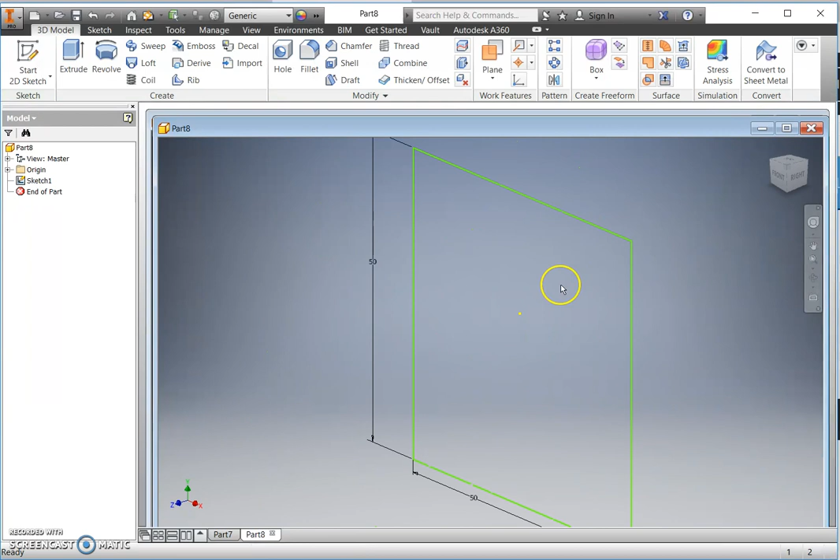I'm now ready to extrude this shape, and to create our cuboid we were extruding this through a distance of 100 millimeters. You will see that size detailed on your plan view. So that's the basic shape to begin with. I'm now going to remove a section at this end and then I'll add in a section at the other.

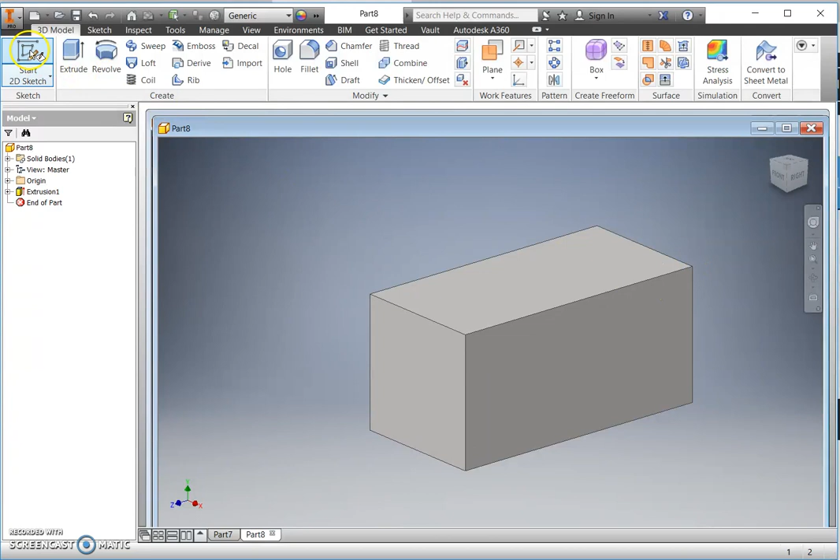So starting a sketch, selecting the surface, and I'm going to add in a circle. Again, not worrying about the size at this stage. This circle has to be in the centre, so when I dimension it, if I know the size between the edges is 50, and is the same from bottom to top, I know the distance between the centre and this outside edge here must be 25.

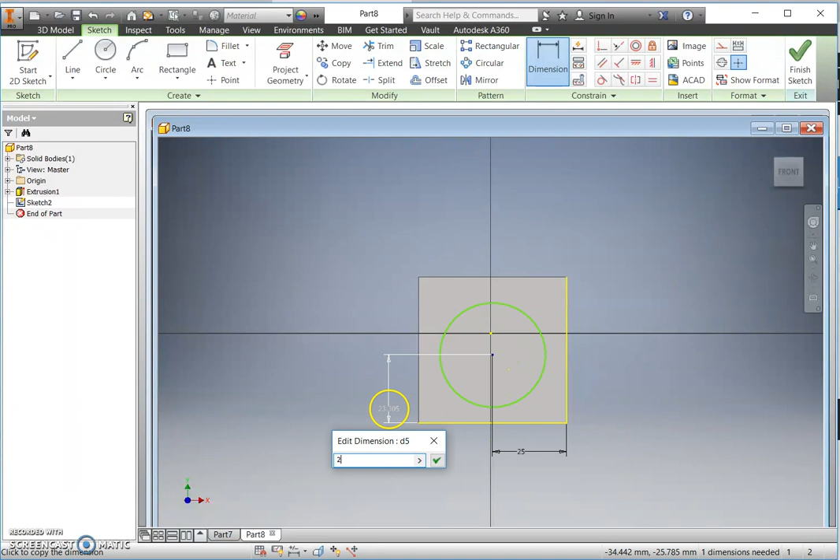Again, the distance between the centre and the bottom edge again must be 25. And the size of the circle, again just selecting the edge of the circle, dragging the dimension out, is 40. I can now finish the sketch and we will extrude our circle.

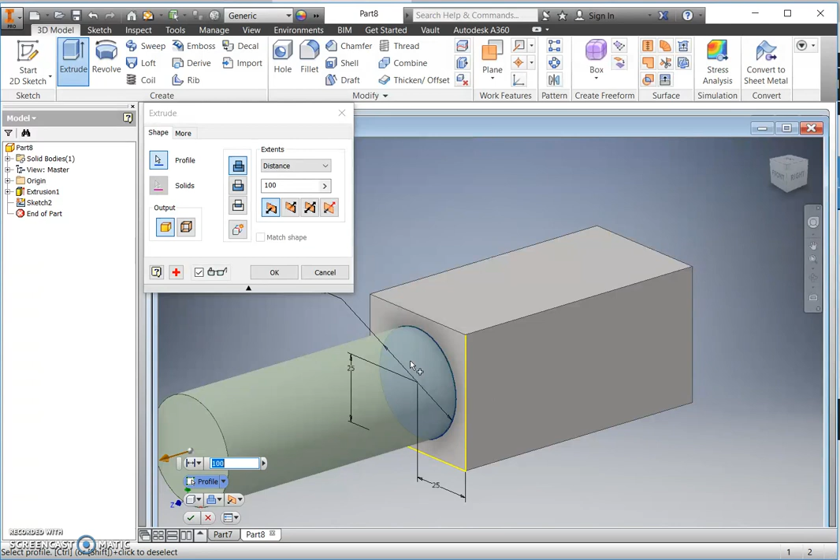This time we're going to remove material, but you'll notice on the elevation we're only removing the distance of 10 millimeters. So we're cutting in 10 and then we can OK. So that's one end done. Let's now look at the opposite end.

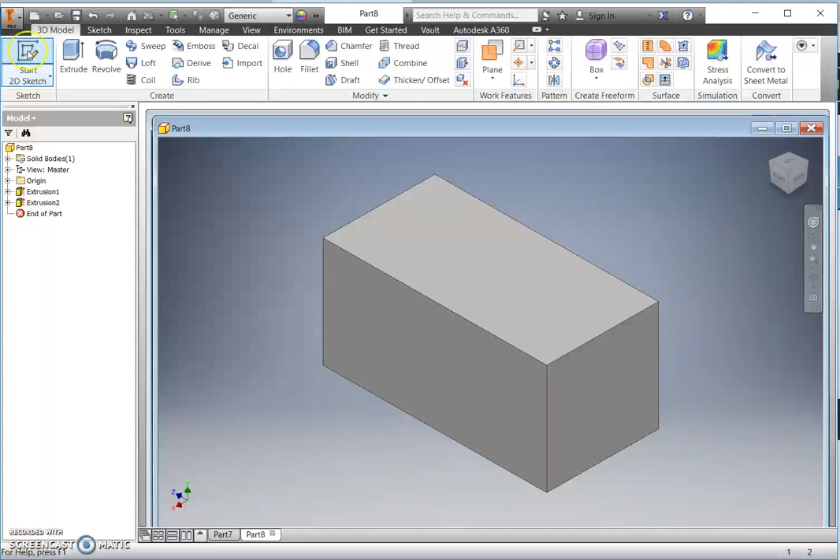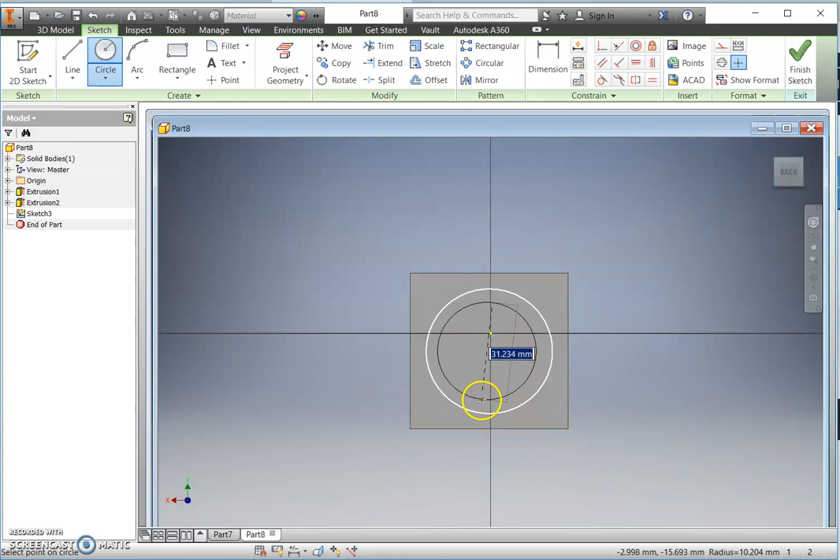Again, I'm going to create a sketch on our surface. I'm going to create a circle, and notice this circle has appeared. Okay, the computer has actually detected that there is something at the other side, so we can look to try and pull the same centre. Now we know we want to get it exact, so we will dimension this ourselves just to give us a little bit of practice.

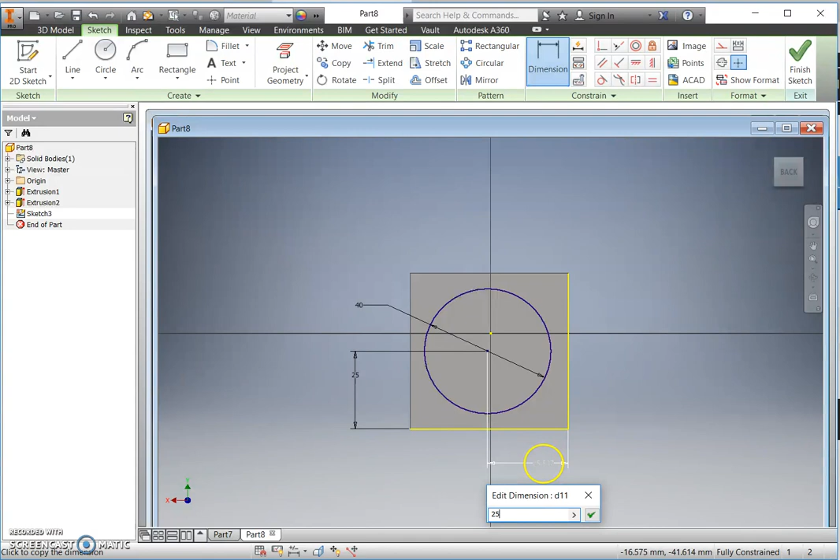Again, our size here is 40. The distance between my centre and the bottom edge is 25. Between the centre and my outside edge is also 25. I can now finish the sketch. I'm going to extrude. That's the surface that we want, and the size is 10. So we simply OK. So that gives us one end and our other end done.

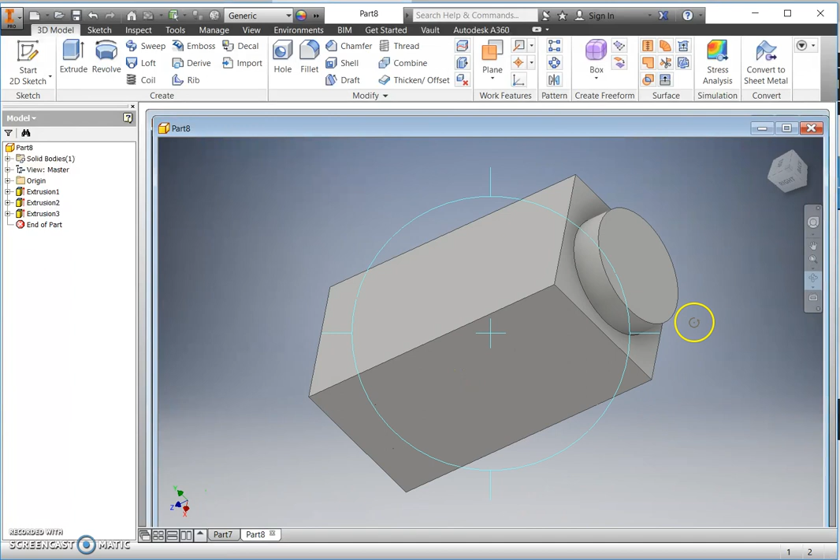Again, you should be growing in confidence, being able to move between the views, and then we can bring our model back to a more sensible position using the little orbit cube at the top.

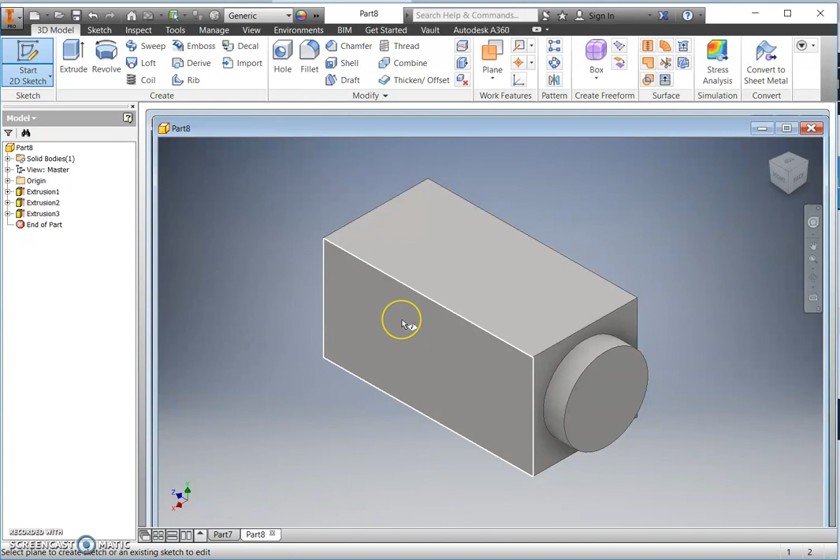Our next step is to cut this circle away. So again, starting with a sketch on our edge, and I'm going to create a circle. Now I want this circle to be in the middle, and if you notice as I'm moving, you'll see the little dot there is yellow. However, when it gets to a certain point, it goes green. That's basically telling me I'm in the middle.

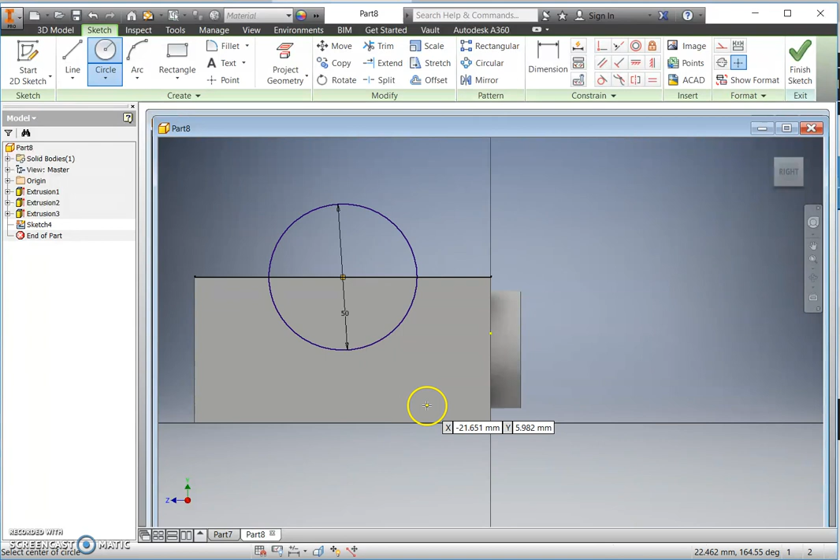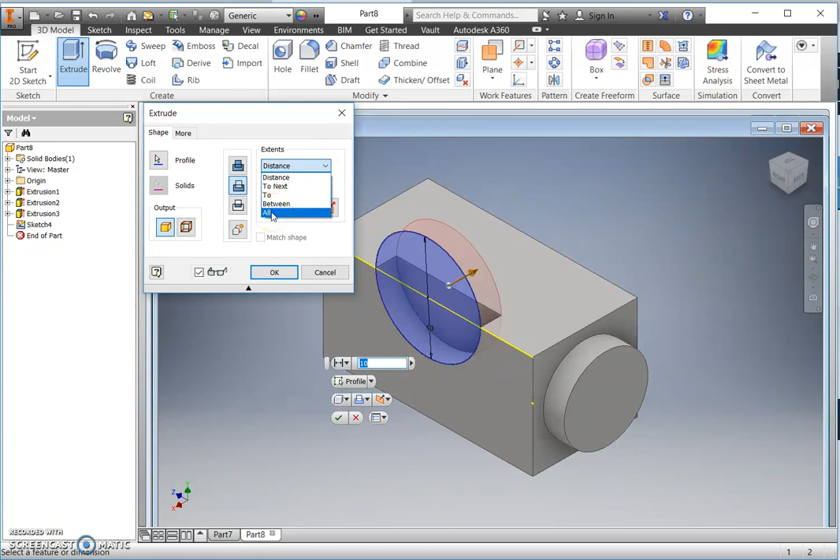And again, the size for this particular circle is going to be 50 millimeters, and that's it simply drawn in. We can now finish the sketch. We're going to extrude. Again, remember, we're going to cut the material away. We can either put in our size, if we remember the size here is 50, or we can simply say cut through all of the material, and then we can OK.

And that gives us our completed Bronze Model 4. Again, please save this into your folder. Simply call it Bronze Model 4 and look to progress to another more challenging model.